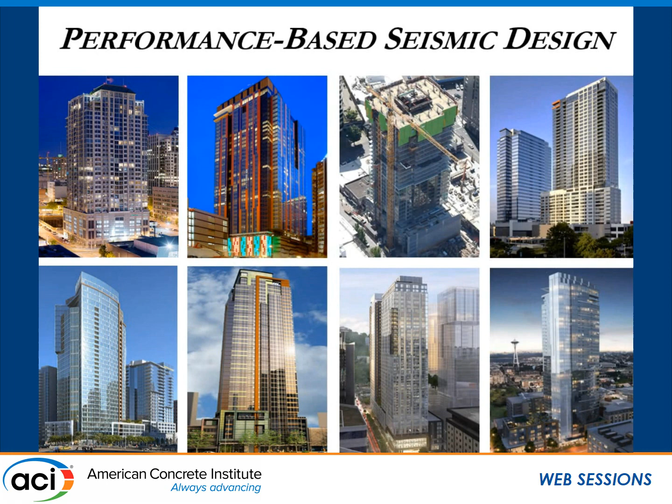This has been presented previously, but the code is prescriptive and restrictive to the design.

I believe the PBD explosion happened because it was basically market driven. A lot of urban sprawl happened in the past decade, and many of these buildings became high-rise residential buildings, not office buildings. The floor-to-floor height was limited, you want open space and balconies, and so on. The codes did not provide an avenue, a prescriptive code did not provide an avenue for structural engineers to create that, so they met the market demand by using performance-based seismic design and proving that these buildings would work, which was great.

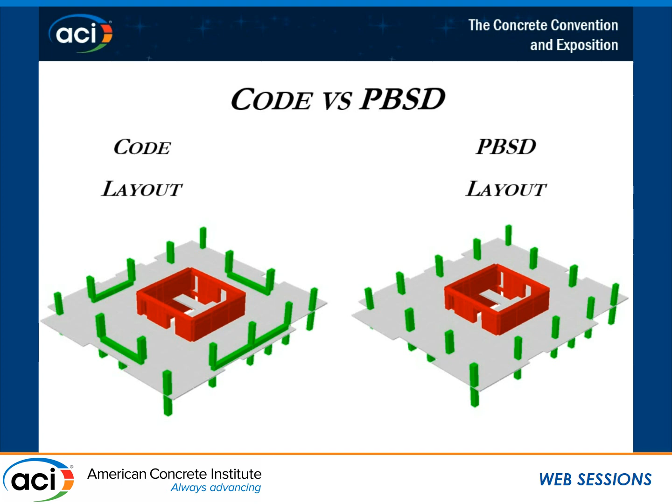But then we added layers of restrictions, which is good because it created guidelines right now. These guidelines are also moving, but they helped a lot, because a decade ago, not having those guidelines was kind of no man's land. It was like the wild, wild west when it came to performance-based design on some of these things. Every peer reviewer had opinions different from the others, so when working between different peer reviewers, you had to translate and work with what they prefer, and maybe argue about what you think is better.

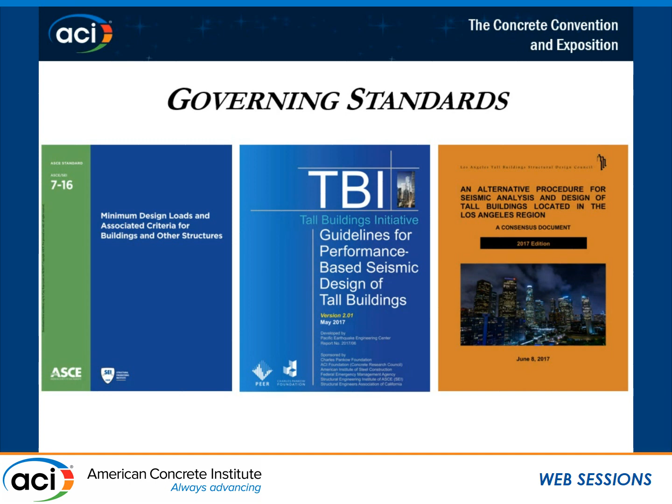Moving on to talk about core walls, specifically shear walls, and how you would look at the core walls. This is basically diagrammatical and a lot of basics. I want to go back to the basics of shear walls here.

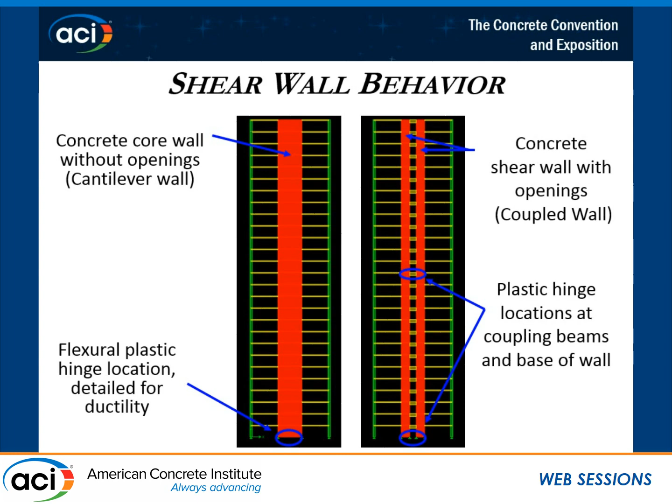318H has been passing a ballot about coupled wall systems, and there's also an initiative to do a P695 study. Research is being funded to basically quantify what's the R value for coupled wall systems, because the code currently does not really differentiate between regular shear walls and coupled walls.

The great thing about coupled walls is that if you have two single walls, you basically increase the moment arm of your system, and it creates more girth to your lateral resisting system.

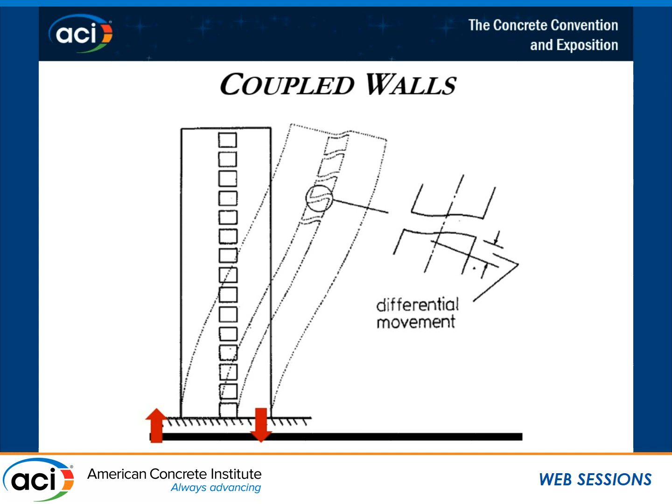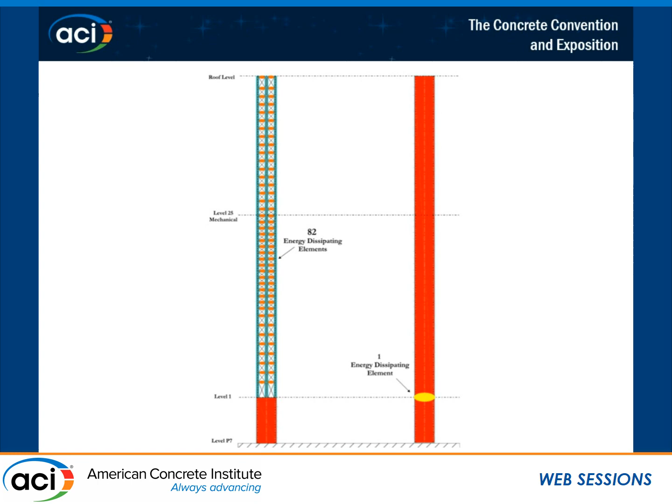Then you go from basically one energy dissipation element to a couple of them along the building, whether it's a 400-foot tower or 500. You end up with coupled walls, you punch a bunch of openings in the building, you detail it properly, and you get all this coupling beam that creates a lot of energy dissipation that is very valuable for your design, and we'll talk about that a little bit down the road.

So core walls, not all core walls are the same.

Even though they all look the same, they're not very much the same, because the opening in the core wall very much varies the behavior of the core wall from the torsional aspect, from the shear demand and moment demand and drifts for that matter.

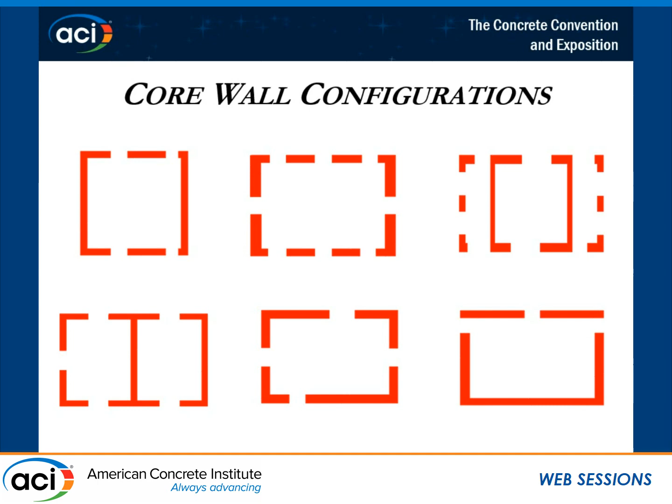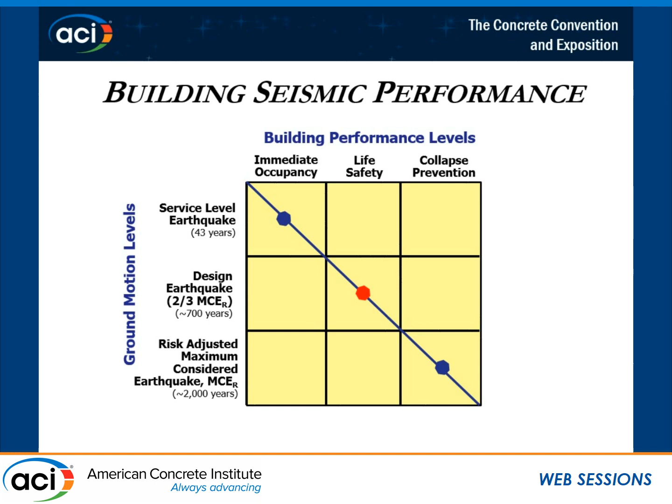This is a core coming up, you can see it here, and you have basically a span to depth ratio on that core of about 12. Then you have coupling beams, 2 coupling beams in the Y direction and no coupling beams in the X direction. The core goes around the elevators and stairs, and it's concentric to the floor plate.

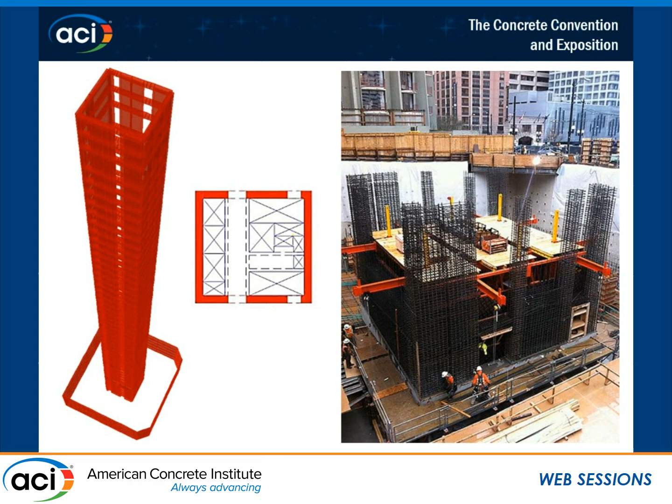The floors are basically 7.5 inch PT slabs, and the whole thing is basically concrete. So for this specific building, we used 7 pairs of ground motion.

And I want to focus on looking at the shear. This plot shows the shear distribution along the height of the building, basically the envelope shear due to the mean of 7 pairs of ground motion plus a sigma. Right here are the shear values, and you can see clearly here that the red is basically the shear value of that core.

The shear in the Y direction, where you have the coupling beam, the maximum shear in that direction is coming at about 4,500 plus or minus. For the same core, we have a solid wall - there is a major amplification of the shear without any coupling beam, all the way up to about 12,000 kips from the same 4,500 level.

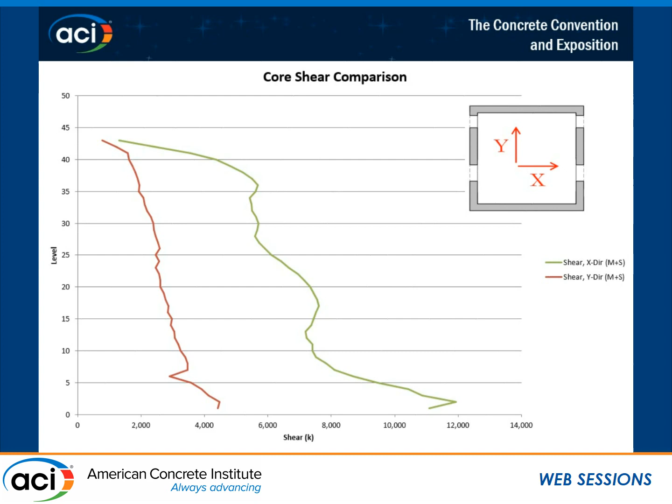And that tells you this is basically a great example of how the core configuration is so crucial to how you lay out your building, and you should be involved with the geometry of the core from day one. I don't think there are any architects here in this audience, so make sure you drive the core openings and try to work with the architect. Creating that symmetry in the core is very important when putting openings in it.

So looking at the spectral response forces, they're a bit deceiving versus what we just saw earlier, even though it's not normalized to the MCE level forces. Just looking at the response spectra from the code in the Y direction, basically the force is about 2,500, whereas the performance-based one here is different.

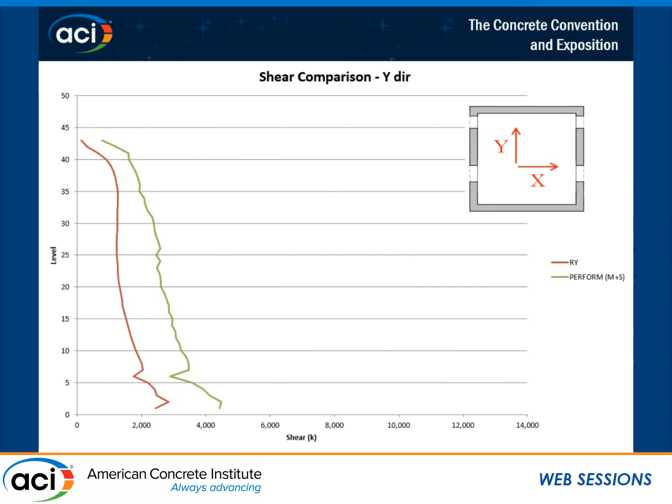So looking at the Y direction, we have the coupling beam. This is the spectral response shear, and it's about 2,500. The performance-based design shear, mean plus sigma, right here is the 4,500 we saw earlier. So the amplification is about twice that when you have the coupled beam. The uncoupled beam side is much more than that.

So going to another case study of a tapered core, looking at this core basically for an office building. It goes up about 500 feet, and we basically truncated the core two-thirds up the building because of the dropping of the elevator banks.

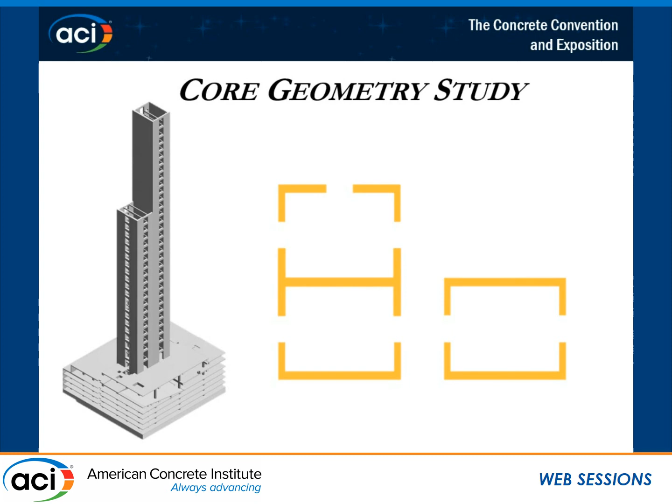And you could see here, in one direction you have coupling beams, in the other direction you have limited coupling beams. So we studied the core in two ways. One way, you could see here the diagram, the core has coupling beams on all three walls, where the vertical axis is the y direction and the horizontal axis is the x direction. And then looking at it using only one coupling beam, as the architectural layout wanted to have.

And the core shear, the shears on this graph right here, is basically the mean of 7 pairs of ground motions applied on a nonlinear Perform model. The height of the building is about 450. It's an office building, about 31 stories.

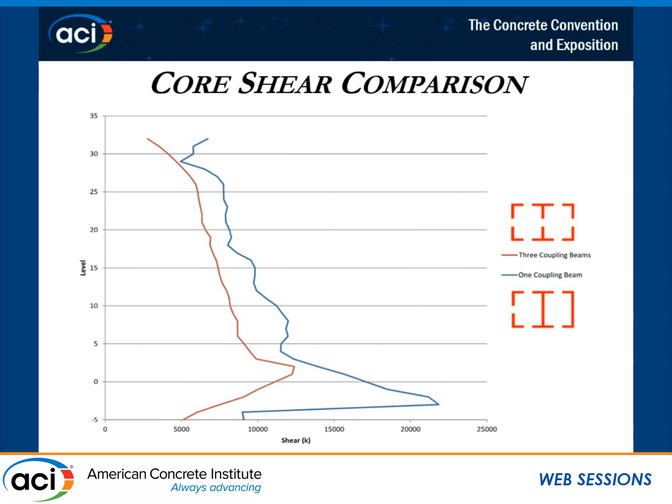You could see here, when you have three coupling beams, the maximum shear is at about level 1 or 2, about 11,000 to 12,500 kips. Whereas when you eliminate those two additional coupling beams on the lower portion of the core, that shear goes up all the way to about 20,000-plus.

So what is dynamic amplification? There's a lot of literature on that. A great reference would be the seismic design of reinforced concrete buildings by Jack Moehle. Basically, there are two factors that really affect your dynamic amplification: material overstrength, reinforcing overstrength, and the other is your higher mode effect.

So looking at higher mode effect in particular, you could see here, if this is your shear wall or core wall, specifically a shear wall, and this is the shear at the base, at your first mode the distribution of the forces is more or less like you see here. So you have an h-eff at about 2/3 the height of the building.

And the moment at the base, since you're going to start having some hinging, is, let's say, the Mpr right here, driven by that lateral force. So the Vb and the Mpr are affected by that force and the effective height.

As the inertial forces change with different modes, they vary along the way, and the centroid of these forces would be dropping to a lower arm. By creating a lower arm, the h-eff right here, the denominator, reduces, so the shear force goes up. The moment is not as much affected by it.

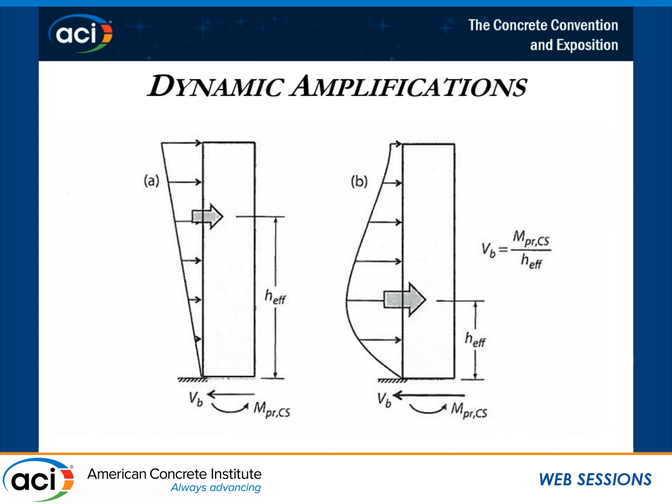However, the shear on these cores is very dramatic, and we've experienced this in a whole lot of core wall designs. So take, for instance, this core right here.

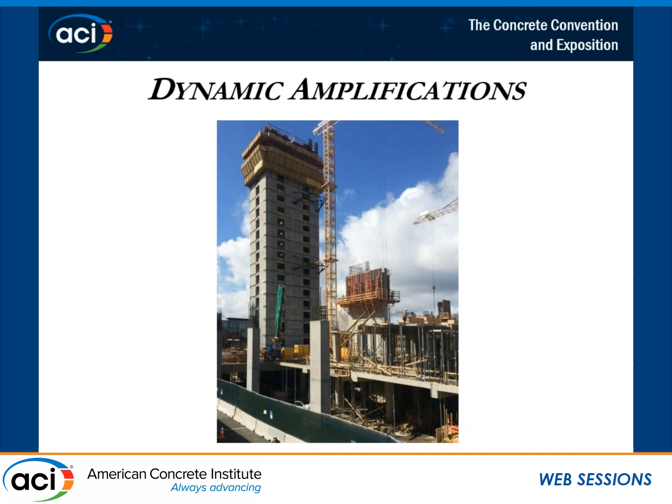If we plot the shear due to the service level, DBE, and basically MCE level, maximum considered earthquake level, you can see here the variation along the y-axis, the height of the building—this is about 500 feet. And you can see that the shear in the core, the overall shear in the core, is highest at the MCE level.

When you get to the blue line right here at the base, this is basically the dynamic base. That reversal here is because you have about 5 levels below grade, and this is basically the dynamic base where you have basement walls tying that slab diaphragm into the base of the building.

When you come to wind, and these are wind tunnel results, the shear is almost insignificant. However, you have to be concerned about drift when it comes to wind—you have more stringent drift limits than we have in seismic.

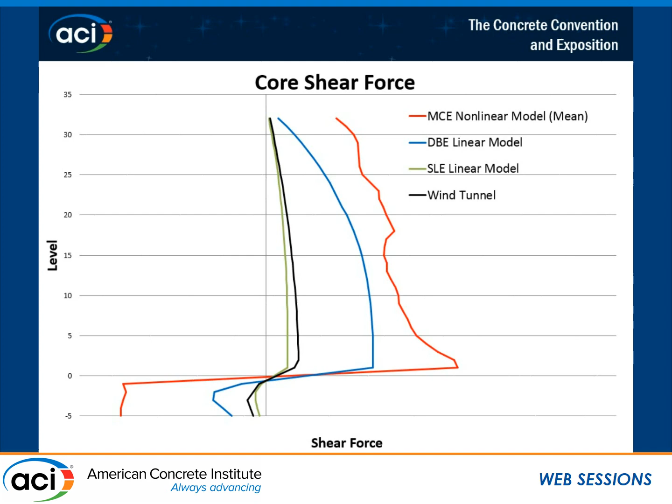And the service level earthquake is also at a lower level. But there is a big delta between the DBE level and basically the MCE level shear at the base of that core, and it varies along the way.

When it comes to moment, for the same core, the moment at the base does not vary as dramatically in magnitude as the shear. However, on the upper levels, you'll see that the MCE level experiences higher moments due to higher mode effect, and if you just use the DBE level design and the spectral response design, you'll be under-designing these upper levels for moments.

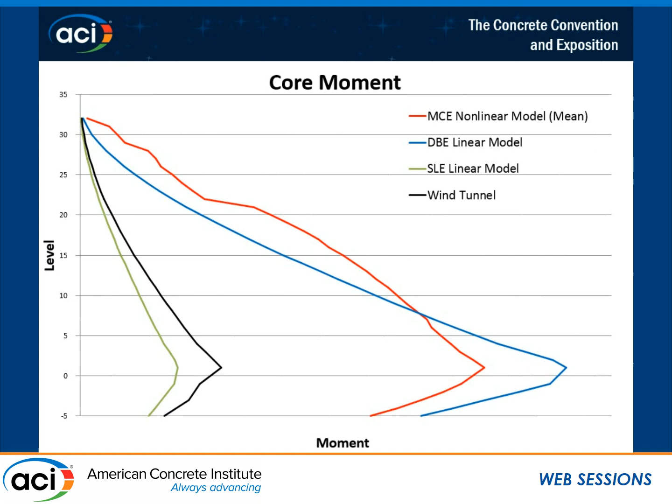So, having said all of this, talked about the coupling beam, let's talk a little bit more about the coupling beam.

What we're able to do these days is use performance-based analysis to come up with innovative ways to do these coupling beams, since this is basically your energy dissipation element that you're counting on in a core configuration to dissipate the energy of earthquakes in a ductile way.

So this is your diagonal coupling beam, a traditional one. A lot of these bars are usually number 14s and 11s. What it does is basically clash through boundary elements, going up through the floor, and when you put the wall below it, these bars you cannot literally move around because they're already cast in the floor below. So bringing another boundary element on top of it is hard to get in.

A lot of times they become non-code compliant as far as confinement around this diagonal reinforcement, because it's almost impossible to get this angle in and get these horizontal ties in place accurately so that it would meet the confining equations of the code.

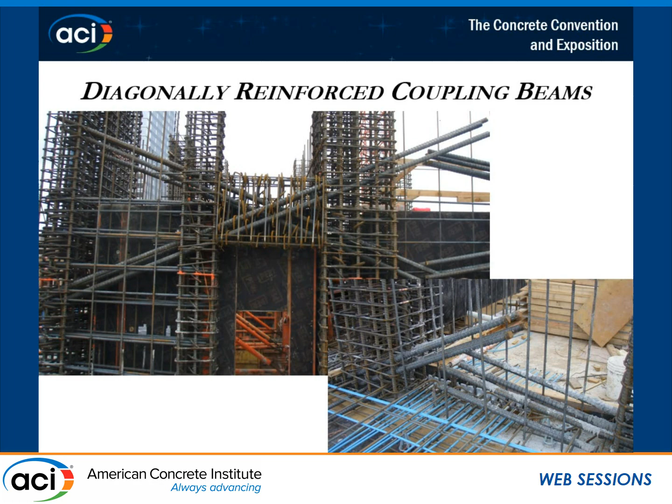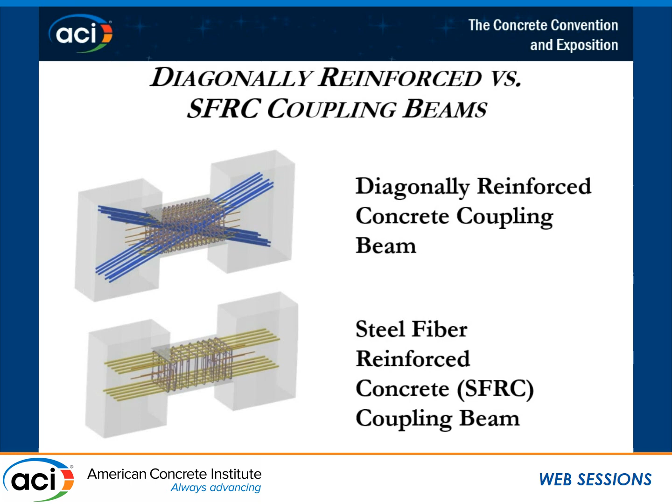So what we've been looking at, my company has been looking at for many years, is implementing a fiber link beam. What you see here on the screen is your conventional diagonal beam, and here is the equivalent capacity fiber beam model. The difference between these two is the boundary element, that's another boundary element of the core, the opening to the core or between two walls. The difference is that the concrete from this face to this face is using steel fibers, high-strength steel fiber reinforcement. So you're able to drop the reinforcement between 40 to 60% depending on your beam by doing so.

This is the first generation of beams we have used, which has now been improved through more testing and more data. What we used is basically the BEKAERT steel fiber, about an inch to a little less than an inch and a quarter, with a strength of 445 KSI. These fibers are highly extruded, so their diameter is very small. In this first generation we used about 1.5% volume, which is about 200 pounds of fibers in a yard, quite a bit of fiber. You cannot pump it, but you could bucket it.

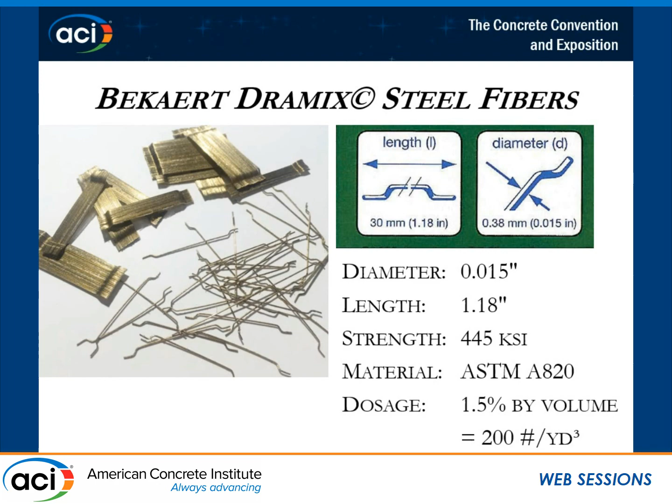These beams have been tested in a number of locations. The University of Michigan started the testing, and then the University of Wisconsin continued on that. Then there was a Pankow fund given a couple of years ago that tested more coupling beams, span-to-depth ratio, and a bit more in-depth analysis on the whole application.

This is a full test panel. These are the two walls, and these are the coupling beams. They had a control coupling beam that had the conventional reinforcement in it, and when I say conventional, it was not diagonal, just a special moment frame, because the diagonal beams perform really well. They were trying to compare the constructability of a conventional reinforced beam versus a special reinforced beam, and the behavior. So this is the outcome of the test.

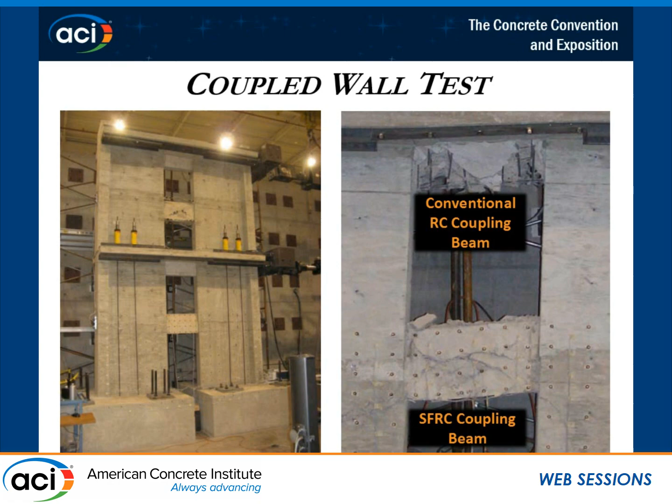You could see how you have thousands of these little fibers in that concrete, and therefore you mitigated quite a bit of the cracking in this concrete beam, versus a reinforced beam where even if you put 4 inches on center ties or confinement, you're still going to have some breakouts of concrete under high rotations.

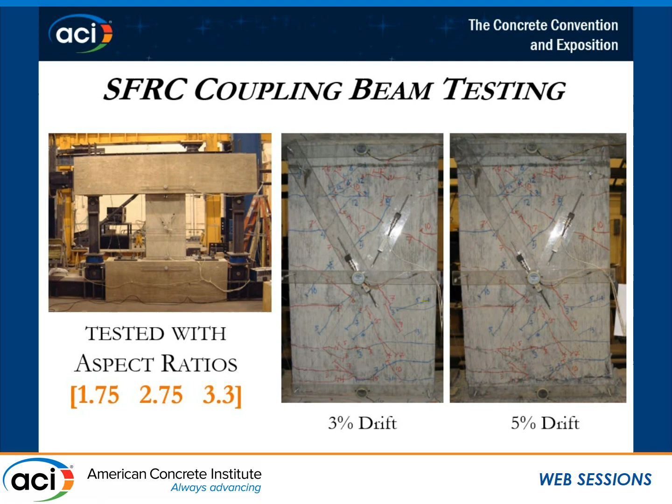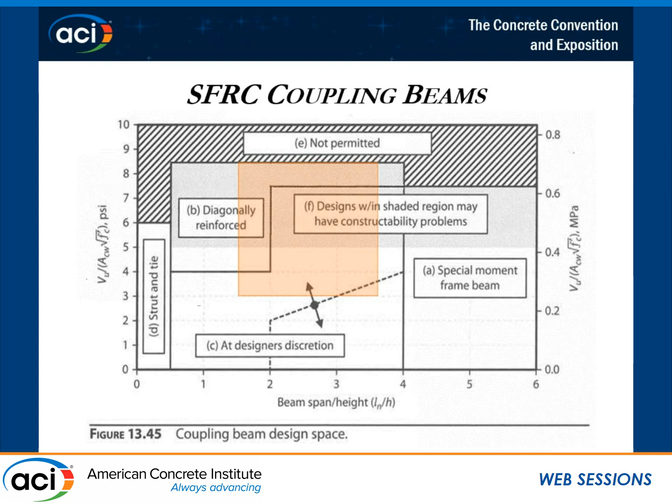So the biggest application of this was on a project called Lincoln Square Expansion in Bellevue. This project is basically urban infill par excellence. You have an office building, which is 31 stories.

The two buildings are 450-foot towers, and you have a podium of retail and amenities. Below grade, you have 6 levels of below-grade structure. The entire job is close to 2.7 million square feet.

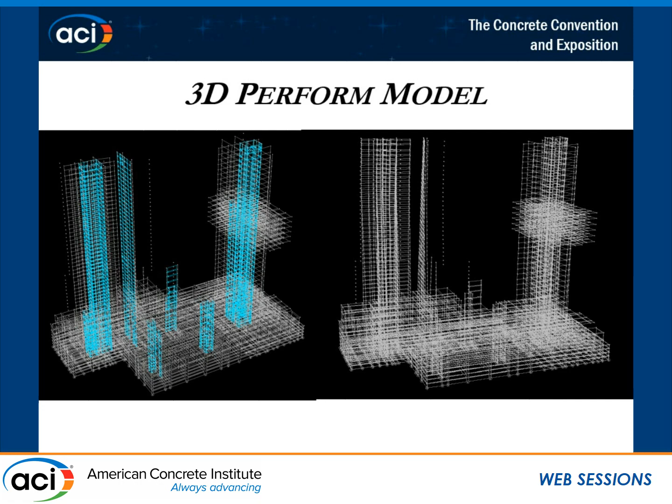So how did we do that? Basically for that particular job, we took a couple of hysteresis loops from testing done on fiber link beams that had a span to depth ratio bounding the span to depth ratios we had on that project for the two different towers. The span to depth ratio of the coupling beam varied between 2.5 to 3.3.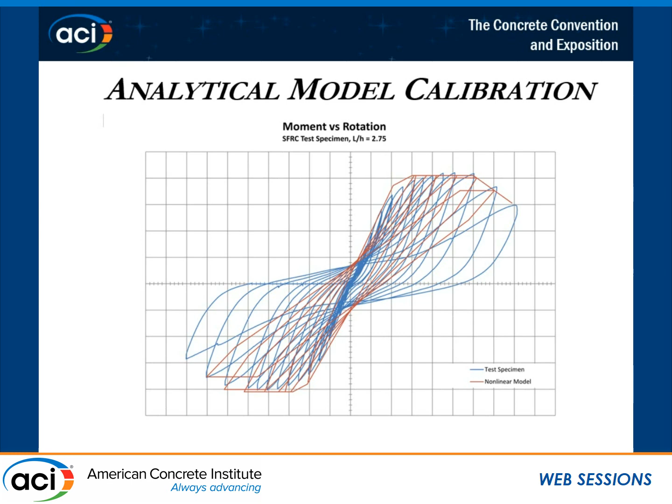And we used this, the blue is basically the tested specimen, the red is basically the nonlinear model of the backbone curve that was used to degrade and analyze this coupling beam in the nonlinear model that we showed you earlier.

So now the concrete is being used for something besides just holding the rebar together, like you'd design a diagonal beam or a special moment frame beam, because you use VC equal to zero. Here, your VC is attributing to the shear capacity of the beam and doing its job, and the remainder of that shear is resisted by the shear steel, using the MPR and VPR approach.

And what you do in the middle, since you have so many fibers, you can drop the confinement. So the confinement in the testing was done at the ends of the coupling beams, and the rest of the coupling beam had just shear steel, because the fibers themselves create confinement in the beam.

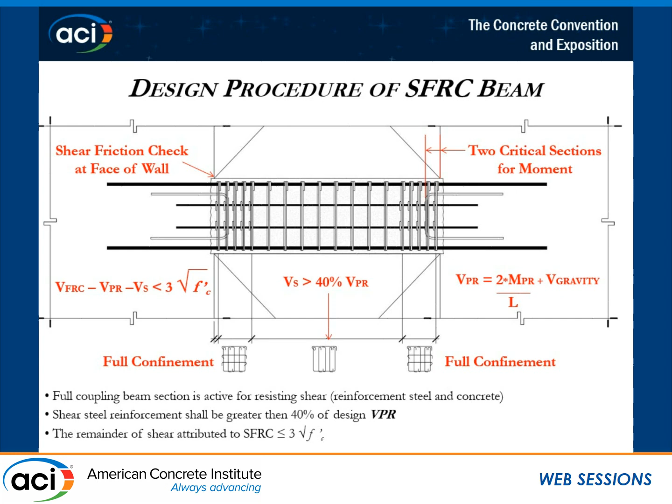This is basically an example of how the beam would look like. You can see the horizontal bar is light, you have confinement at the ends and shear steel in the middle, and you're able to put penetrations in locations where your shear section would work. A lot of these coupling beams, after a certain level, penetrations are acceptable because you don't have the confinement that restricts you from penetrating into the core and outside the core. That works well with building functionality.

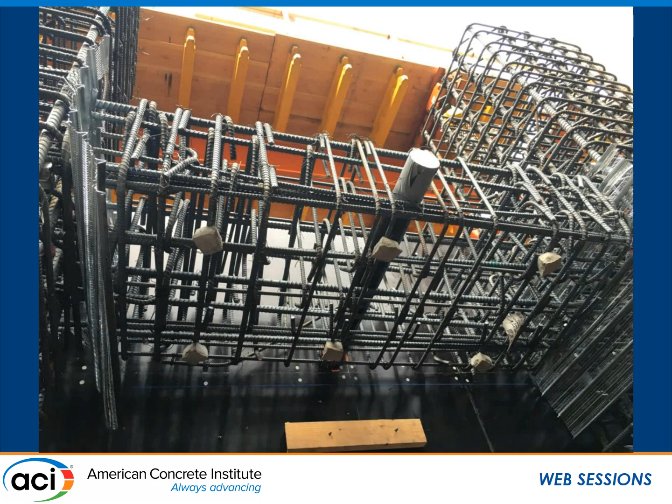So we have done about 4 towers like this. These are the coupling beams that are here. This is a close-up look at them, and a lot of questions come up about the concrete, how it's going to look with all these fibers in it.

It doesn't look very different from regular concrete. This concrete right here is fiber concrete, and this concrete is regular concrete. Because the fibers are so small, the paste kind of covers them. The only time you may see some variation between the two is at the joint interface if there are some remnants of fibers. Besides that, it's the same.

Looking at that, the compressive strength was a little bit higher than you would expect because of all the fibers. So there's a testing procedure to follow since you're adding fiber to your mix, and the best way to add these fibers is at the batch plant.

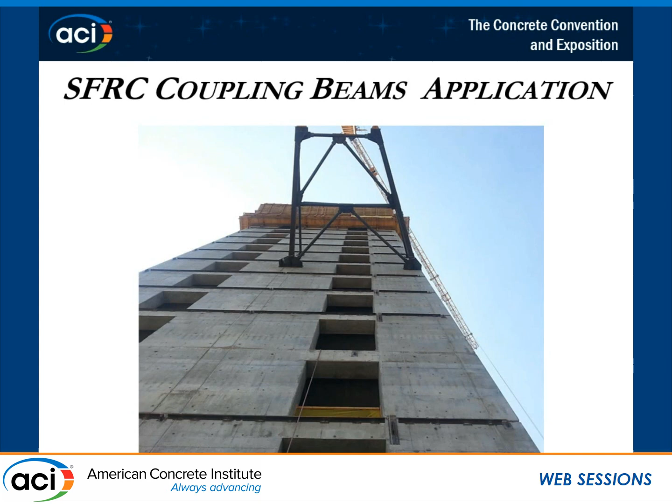So you take all these problems with installing reinforcement in the field, and instead take it to the batch plant, put fibers there, let them mix it, and bring it out. The concrete ready-mix suppliers don't like it very much, but it sure does help save quite a bit of time in the field, especially when you have a lot of coupling beams in the core.

So that concludes my presentation. Thank you very much, we have time for questions.

Question: For the shear friction check, I know you had the joint right up against the wall, but let's say you could get it 6 inches in or something like that. Is there a shear friction benefit that's demonstrated?

So what we did, well, it's also a constructability effect. There's a little bit of benefit if you get the fibers into the wall, then they can participate in the moment. We don't use fibers because we stop them at the wall, we don't use these fibers for moment. That 15% of the moment could be resisted by the fibers. So if you take it further into the boundary element, yes, how are you going to do that? It's pretty darn hard unless you put the whole thing in fibers. Now what we did is we basically shifted, we added some U-bars in the testing to shift that hinge further into the beam instead of into the boundary.

Question: Any durability or corrosion concern of the steel fiber when you put the coupling beams in steel?

Well, I got that question too, but we never tested it underwater or under weathering environments. A lot of these cores, because of the energy code, are covered, so it's very seldom you see them exposed to weather conditions above grade, maybe below grade, but there's not much weather going on below grade anyway. So I don't know how that would affect the rustiness of these fibers. But these fibers are highly extruded material, so they're very resilient. All right, thank you.